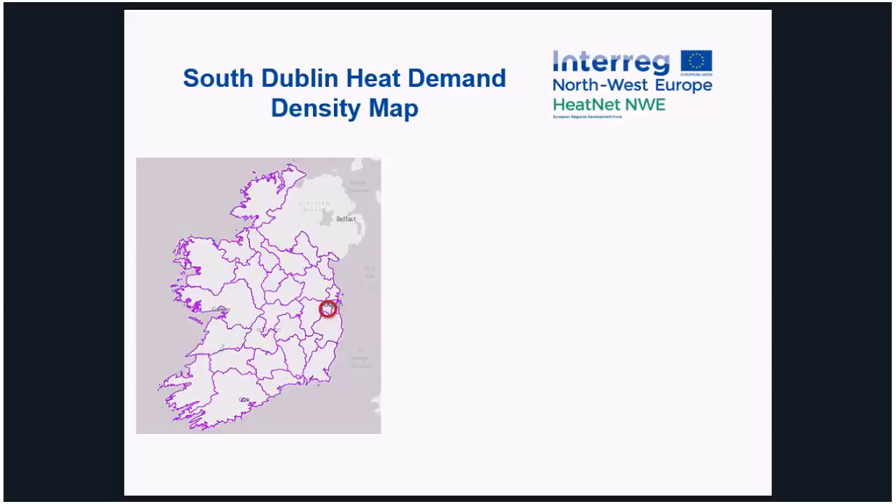We developed a heat demand density map for the region as a first step, to see exactly where district heating is most suited. This is based on European best practice methodologies, specifically from the likes of the Heat Roadmap Europe project.

So we've learned how to map heat demand density, and in this case we base it on terajoules per kilometre squared. In the map, any areas coloured light yellow to red would be deemed suitable, with heat demand densities that would make district heating viable in those areas. So you can see there are a lot of areas where we can start progressing district heating.

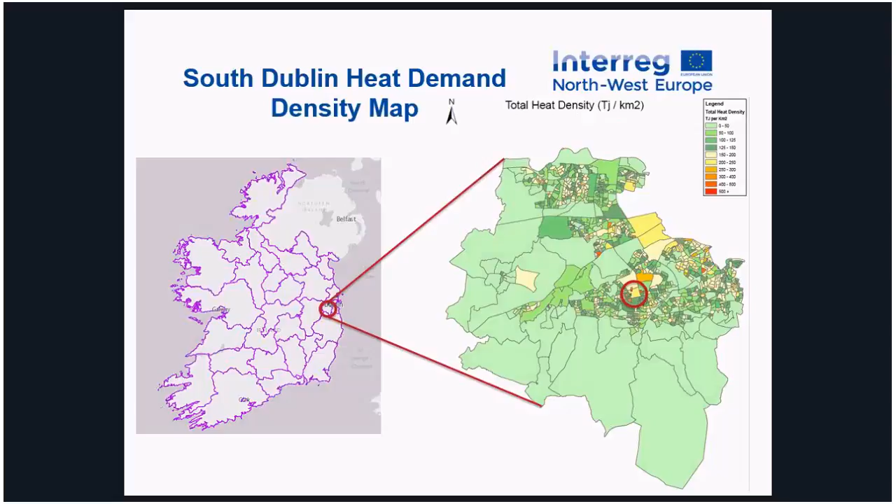But we took the centre, the town centre of the South Dublin region, called Tallaght, as the first stage, because they have a lot of high heat demands in close proximity, and there's a good mix of buildings in the area.

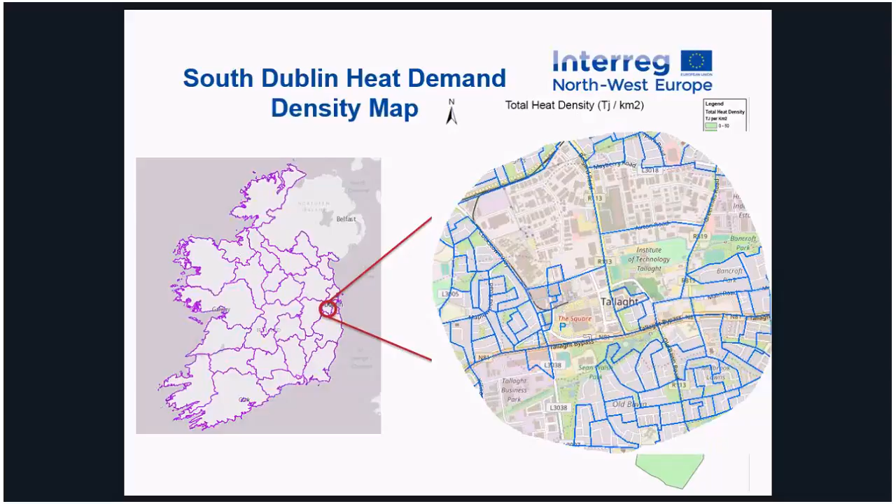So to develop the first phase district heating network in South Dublin, we're looking at the area shown. The energy centre site in the centre is owned by South Dublin County Council, and is where we're planning to build the energy centre itself.

So we've zoomed in on this area as a high potential area for district heating, and in the first phase we're going to concentrate particularly on this area here. We're going to look at connecting the National Hospital and the local authority buildings to the energy centre site as the first phase, and then look to connect to some of the other surrounding large energy demands at a second phase.

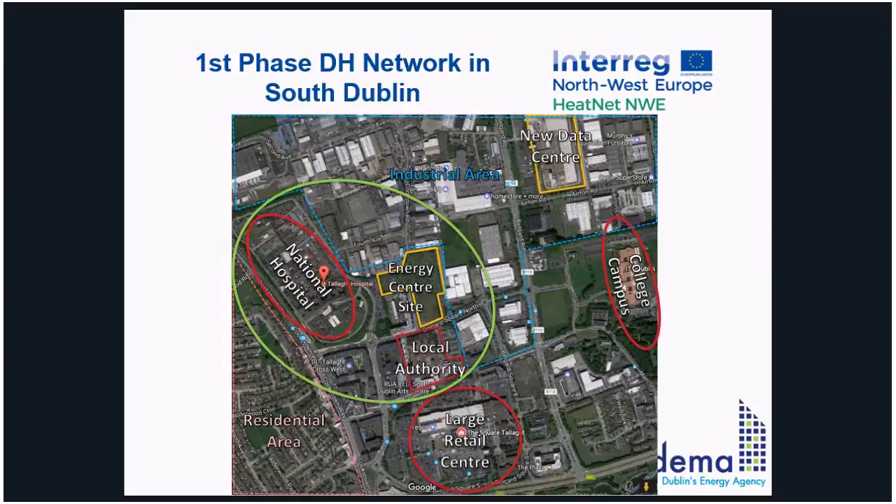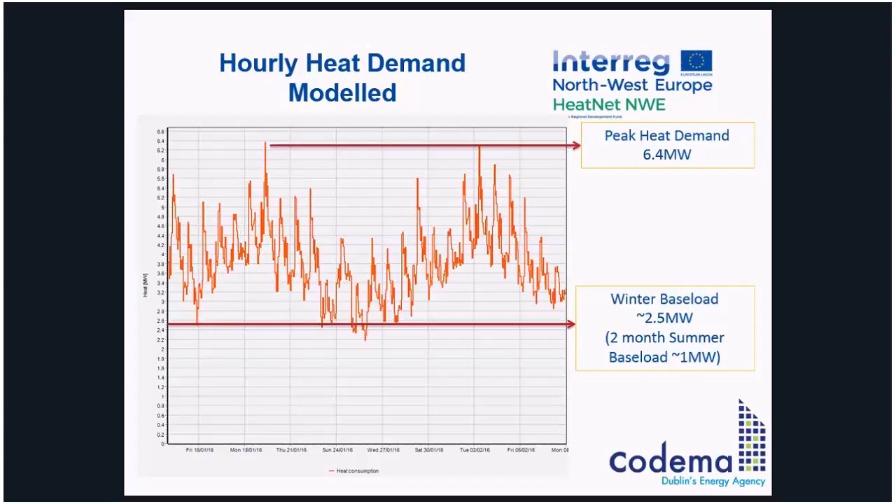We've also modelled the electricity demand of the hospital, as we have potential to supply the hospital with electricity as well as heat. The peak demand there is about 2 megawatts of electricity consistently throughout the year, with a base load of 1 megawatt.

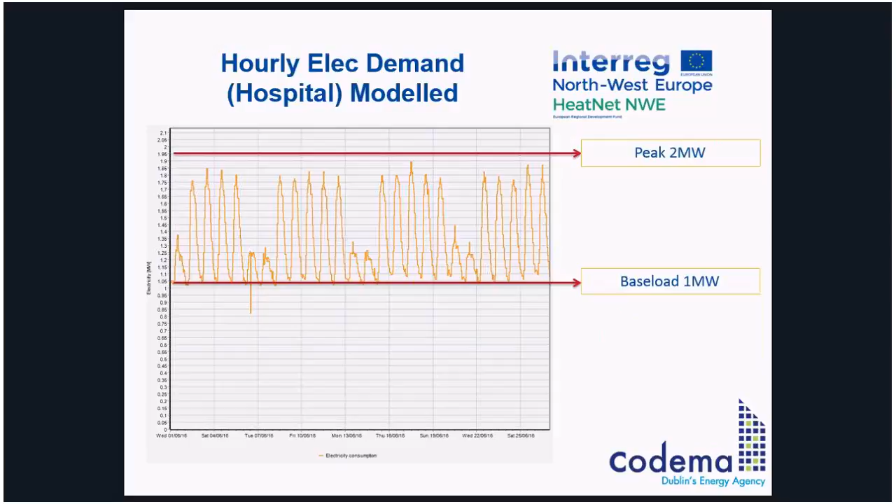So from this information, we are now looking at different technology options that will supply both the electricity and heat demands of these buildings.

So we're looking at air source heat pumps. In Ireland we can achieve a COP of around 3.2, but unfortunately these air source heat pumps alone can't reach the temperatures of around 80 degrees Celsius that we require in order to feed the heat demands of the hospital.

Water and ground source heat pumps - we've investigated the geothermal sources in the area. Aquifers with high yields are not likely, but a vertical closed loop system could still be an option. And as was shown in the last slide, there's a data centre being built very close, within 700 metres of the energy centre site, so there's possible waste heat recovery from the data centre as well.

Obviously, biomass or gas CHP is also an option in order to feed the electricity and heat demands. The site itself is quite easy to access for biomass deliveries, but there may be problems with particulates in the area because it's in a high density area, very close to the hospital and residential areas.

We may not be able to supply electricity directly to the hospital because in Ireland we have a private wire network regulation, which means you cannot supply electricity directly to another privately owned building on another site. So the electricity must go through the distribution system. At the moment we're trying to find a way around this, but it may not be possible to supply electricity directly, and in this case we would have to supply to the grid if we're looking at CHP, and grid connections can be expensive and take a long time.

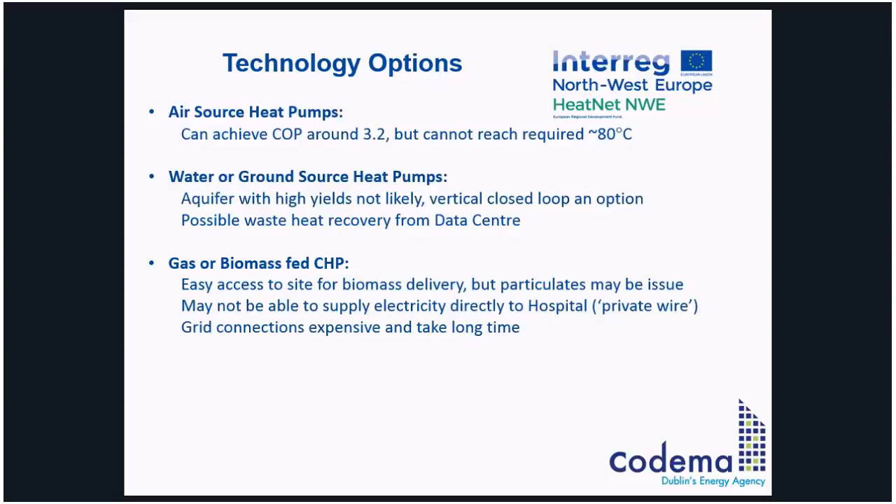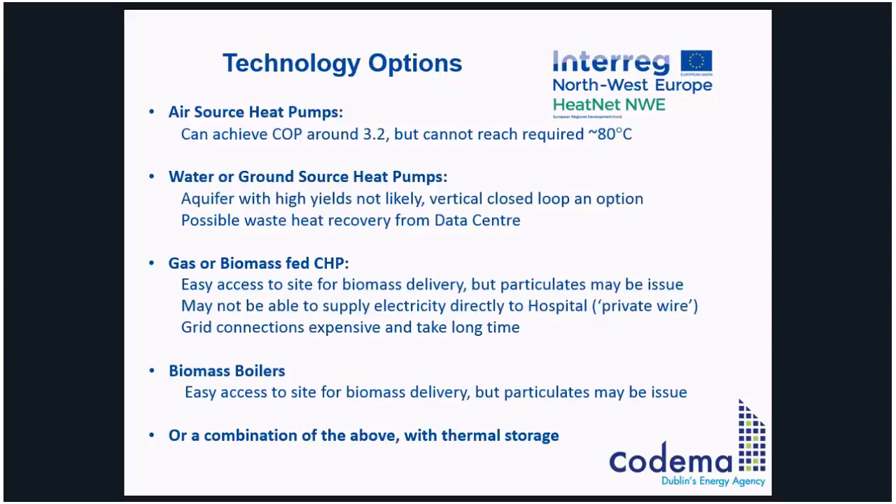Biomass boilers, again, are easy to access for delivery, but again particulates may be an issue. So we're looking at either some of these technology options or a combination of the above, in combination with thermal storage, in order to maximise the efficiencies of any of these systems.

So the main issues for the project are the energy centre itself: what is the best mix of technologies to use in order to meet these heat demands and reduce the costs, and also to achieve some aspects of fourth generation district heating.

The National Hospital, how can we ensure security of supply, which is obviously a big issue for the hospital. And also we have a problem in the hospital at the moment with the delta T, which is the difference in the flow and return temperature, which is very important for district heating in terms of losses and the operation of any of the technologies such as CHP or heat pumps.

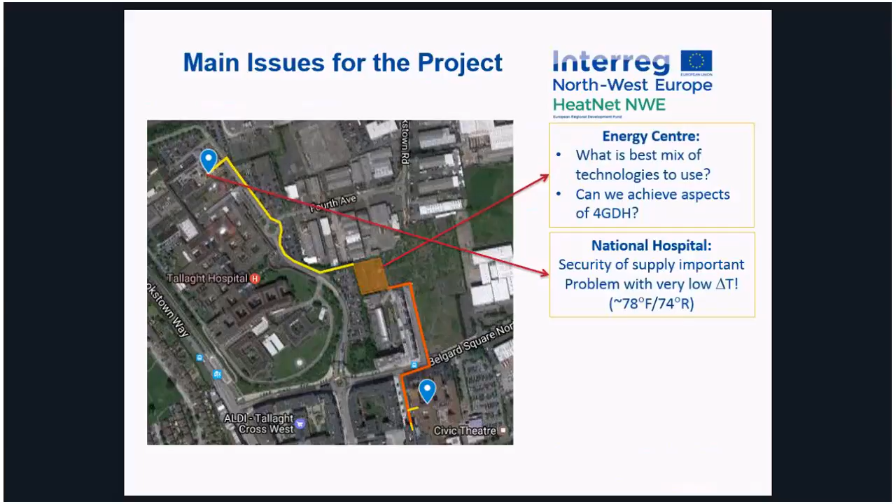So at the moment we have a flow temperature of 78 degrees and a return temperature of around 74, so there's only around a maximum 4 degree delta T at the moment, which is a problem that we need to find a solution to. And in South Dublin, for South Dublin County Council themselves, this will be obviously the first district heating system established by South Dublin County Council.

So what is the most suitable business model option for South Dublin County Council, and what would be attractive business models for ESCOs in this case, and what would be the best procurement approach in terms of, should we look at separate contracts for designing and building the network and the energy centre, or should these ideally be designed and built by the same company? So these kind of questions we would like some advice on from the Celsius experts.

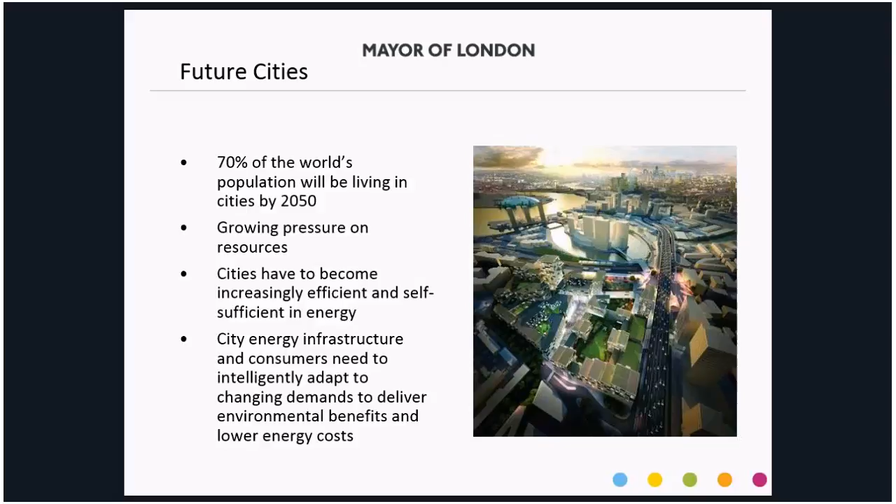London, like many cities, is facing big population growth, massive pressure on resources, housing, transport, education, and it's also increasing demand on energy and energy infrastructure. We therefore need to become more self-sufficient in energy as cities, and also take advantage of smart technology developments to ensure we get the very best out of the infrastructure capacity we install. So we think very much about new energy vectors, energy sources, and how these will be delivered within cities. It's important we begin to think about using less resource and introduce in particular renewables and non-polluting sources.

We can't avoid the fact that energy production locally produces air quality issues. London's in breach of its air quality limits already.

So these are some of the many parameters we've got to deal with when thinking about energy in our cities. It's also important that we think about our role as part of the national energy system to contribute towards security of energy supply.

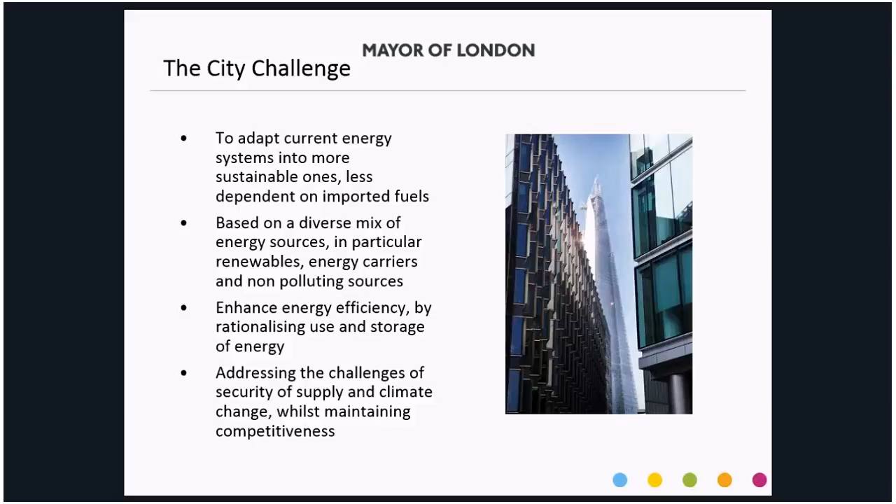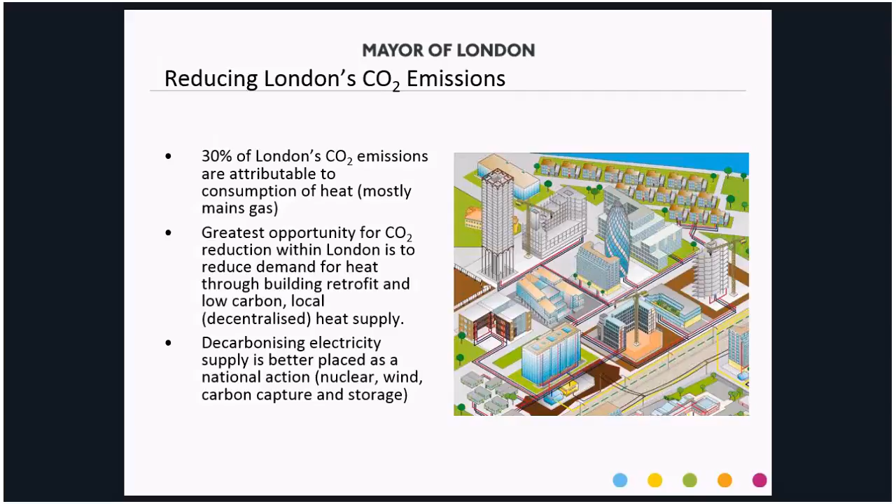We also begin to envisage storage of energy, both electrical and thermal, as being quite fundamental to an optimized system. The biggest CO2 emitter in London, and in fact most European cities, is the energy consumed in building heating. We consume more energy there than in power generation or transport, but it's the least thought about source of emissions, and has the least regulation and policy in place.

So the Mayor has several instruments that came into place. The Greater London Authority was established in year 2000. It has established key documents such as the London Plan, which sets out the policies for London, that it will contribute towards CO2 reductions, and has a certain amount of planning power requiring new developments to either connect to a new heat network, or to connect to heat networks if they exist — of course, we have very little in London — or install their own CHP.

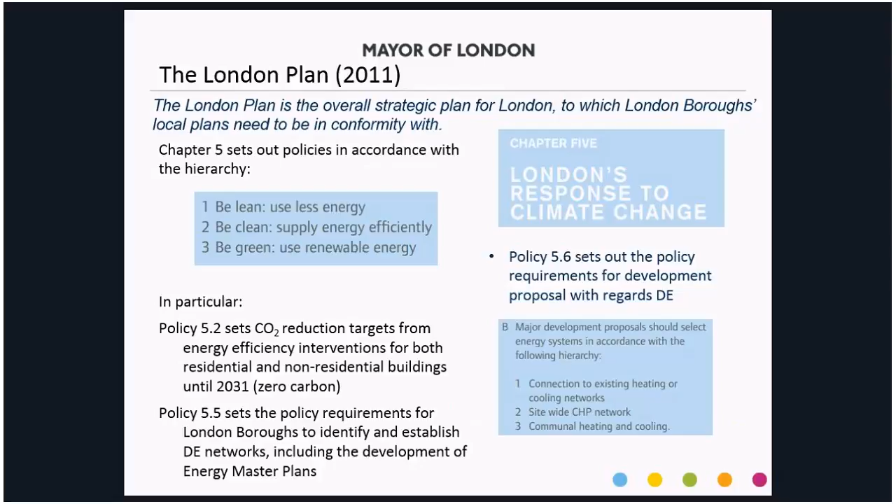So that's been moderately successful, but there are still much larger scale projects that can be done that the London Plan doesn't really establish. The Mayor has produced his climate change mitigation and energy strategy.

Another key document that sets targets for London. The key one for me is that 25% of London's energy consumption is supplied from decentralized energy by 2025. We think this is about an £8 billion investment opportunity.

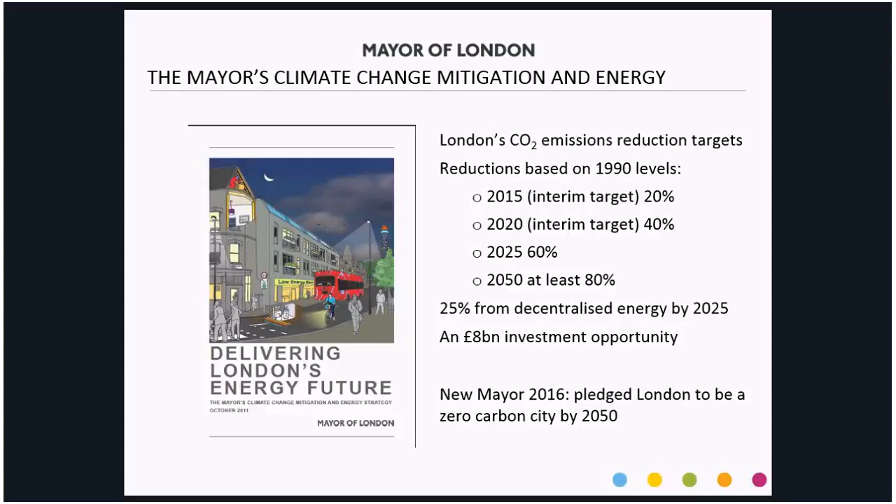So how do we actually get investments into London of that scale? What role does the Mayor have to play to remove the barriers for, principally, the private sector to play its part? If we can get the private sector to play, we'll come a long way in trying to meet these targets. Our new Mayor in 2016 pledged London to be a zero carbon city by 2050. So, very, very challenging targets.

We're in the process of developing more planning tools to inform our policy officers. We're rewriting both the London Plan and the London Environment Strategy. The London Energy Plan is a tool that will be rolled out in the next couple of months, which will help us develop various technical scenarios to meet London's heat requirements.

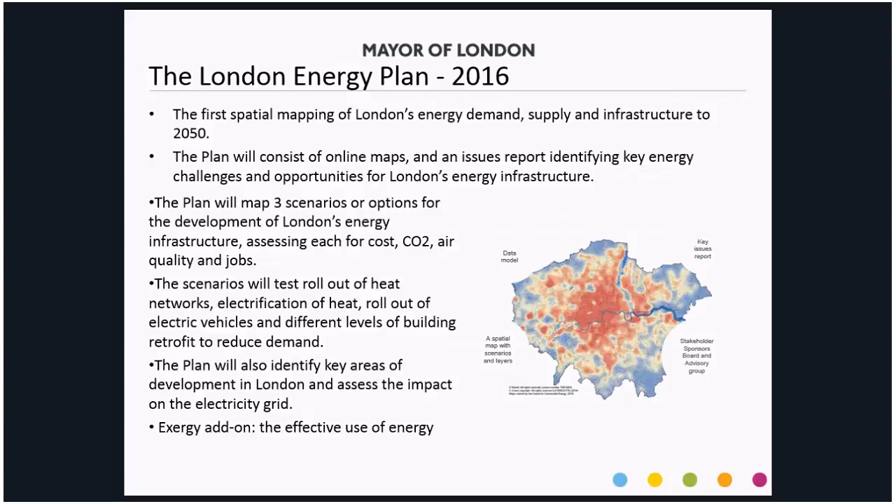Fundamentally, we classify decentralized energy into one of three types. Type 1 are small gas engines located in individual buildings — the London Plan delivers those. Type 2 and Type 3 are larger scale schemes centered around a single energy center with multiple heat consumers. At this stage, we begin to see the introduction of heat networks as the energy carrier connecting the energy source to consumers.

Most of our work at the moment is around establishing the Type 2s with an ambition to become Type 3s, where they take large amounts of surplus heat from power stations and energy-from-waste plants, and transmit these over transmission networks and distribute locally using local heat distribution networks. This is very similar to what we see in the Nordic countries, and this is what we're planning to try and achieve in the coming years.

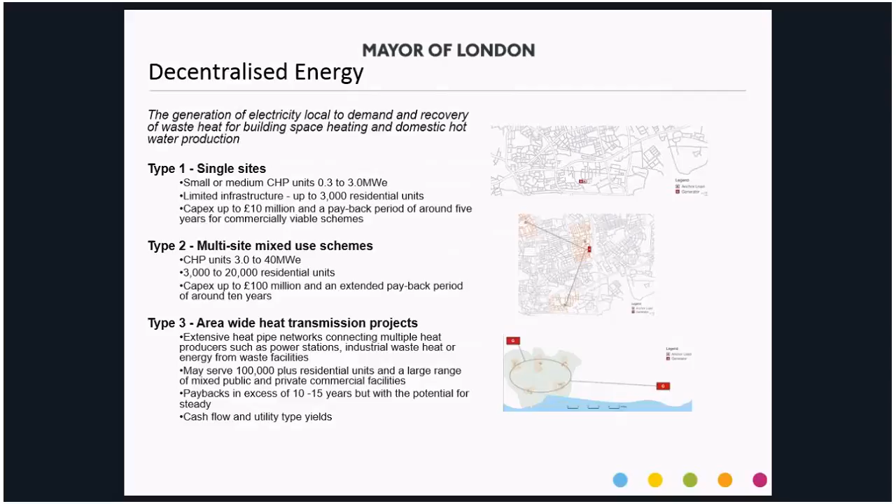So the London heat map — Donna has her heat map, this is the London version. It identifies where the most heat dense areas are, and therefore theoretically best lend themselves to district heating solutions.

We take those, and the Mayor has been providing technical, commercial and financial advisory support, starting with heat mapping, moving on to the energy master planning where we try to establish the extent of market-competitive heat networks. Master plans act as an evidence base for local planning policy and help develop appropriate policies in the boroughs to promote and require heat network projects, decentralized energy projects, to be developed.

But there's a further role then for boroughs to get involved in delivering projects, and that's taking them through the conventional chain of feasibility study, business case, business plan, procurement, and into commercial operation.

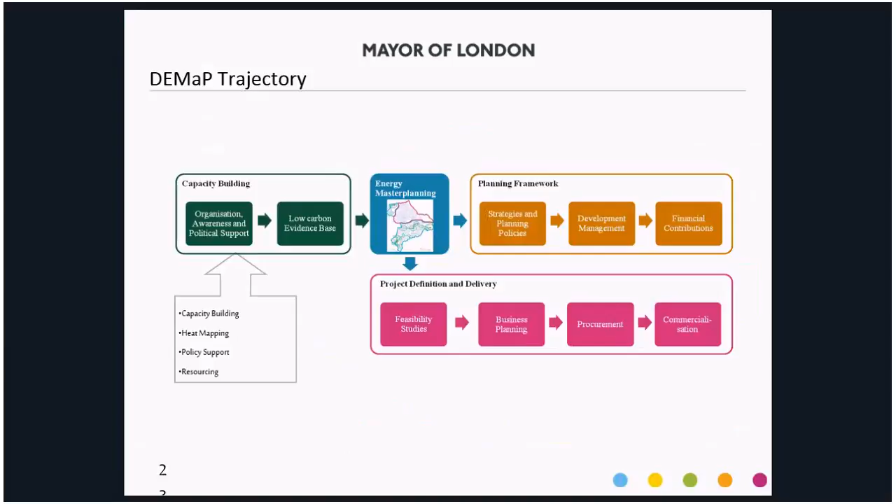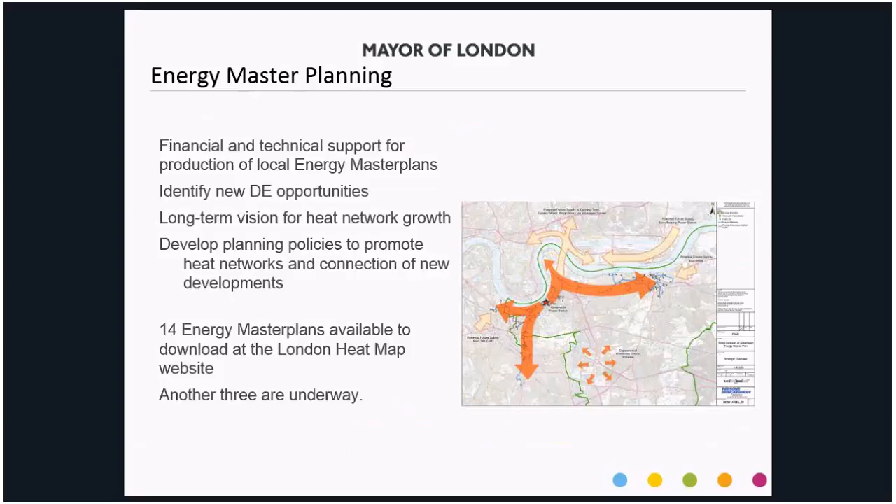Master planning is about establishing the roadmap for the specific area. Typically from this we would identify satellite clusters that would be built initially, with a view to over time interconnecting to form the large area network. These will take 15 to 20 years to evolve, but without the master plan you are blind as to the potential, the direction, and the technical requirements of the satellite scheme. So for me these are fundamentally important to area-wide networks.

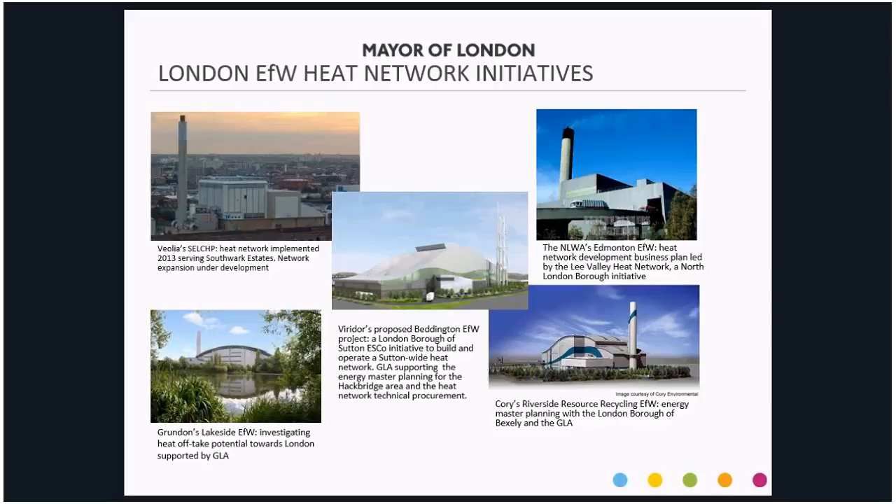Some of the big energy sources, largely untapped but now changing, are London's energy from waste plants, typically with steam turbine electrical output, efficiencies very low in the low 20s, 25% efficient. We now have worked with SELCHP and Lee Valley Heat Network. In fact we've engaged with all the energy from waste plants, some of which have now established heat networks on the back of them or are in the process of doing that. Every new plant in London will be built as a combined heat and power plant, and we work closely with them to ensure the heat offtake is carried out at the pressures and temperatures that lend itself to the lowest possible cost heat supply. It's a very important aspect of energy from waste plants.

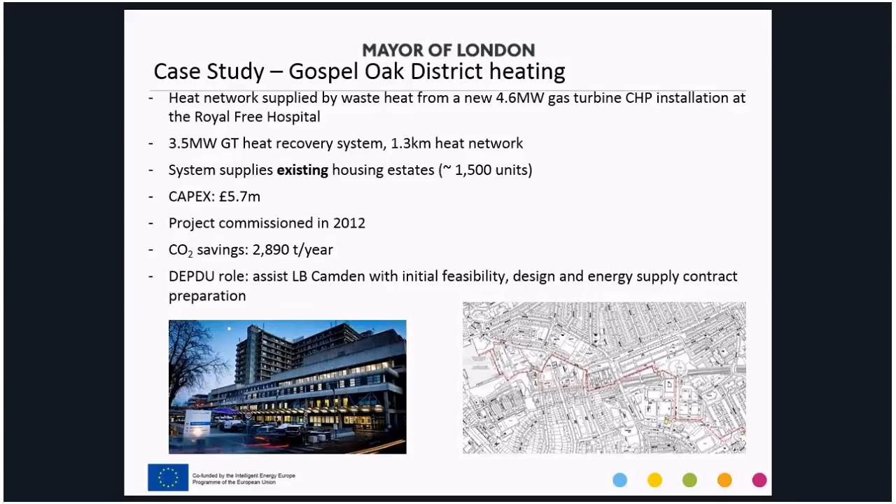One really important aspect of all this study work, which we are beginning to promote more and more, is carrying out the risk register, establishing a risk register for the project. There's a whole range of issues you need to consider, and that helps shape how you go about procuring the plant and equipment, who you contract with, and how much you can rely on them.

Bitter experience in London is you can't rely on any commercial buildings or commercial heat suppliers for their longevity in heat supply. So Donna mentioned data centers - what happens in 5 years' time when technology changes, or they relocate, or technology improves so there's no heat? We've worked with commercial power plants, sugar refiners in London, all of which were unable to commit long term. So in developing and designing your schemes, you've got to really think hard about the energy source, its longevity, or your key anchor heat loads.

The concept here for heat networks is to connect as many heat consumers as possible to get a very diverse energy base and ensure very high operational efficiency, high load factors, and not rely too much on single large institutions as heat customers.

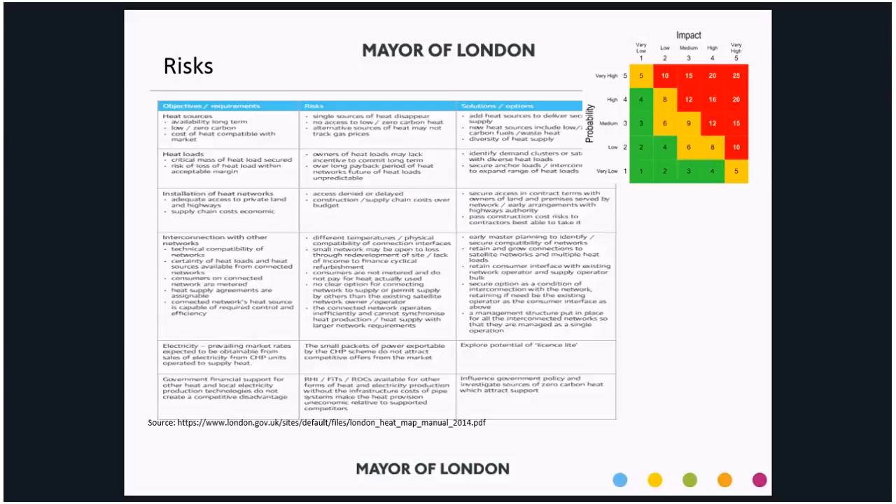So, quick summary. The public sector has a fundamental role in establishing heat networks in cities - establishing the appropriate strategies and policies, then going through the development and evolution of the energy master plan that gives us the long-term roadmap to achieve the strategy and policy objectives, such as CO2 emission reductions in London's case.

Then trying to establish major heat producers. Energy from waste plants are very good in London because they're usually connected to 40-year municipal waste contracts with councils. So we go after those with great enthusiasm.

Furthermore, the public involvement will be about establishing the relevant planning policies around heat networks, requiring developments and developers to safeguard routes and space for energy centres, particularly where we're crossing rivers, rail lines, and other difficult barriers. They can also provide their own buildings, which gives you better assurance around heat load guarantees.

The public sector can also finance projects at lower rates of return than the private sector, and develop delivery vehicles, particularly useful for schemes with long-term build-out plans, because the public sector can take different investment decisions than the private sector would. Therefore, in my view, this lends itself better to larger scale schemes.

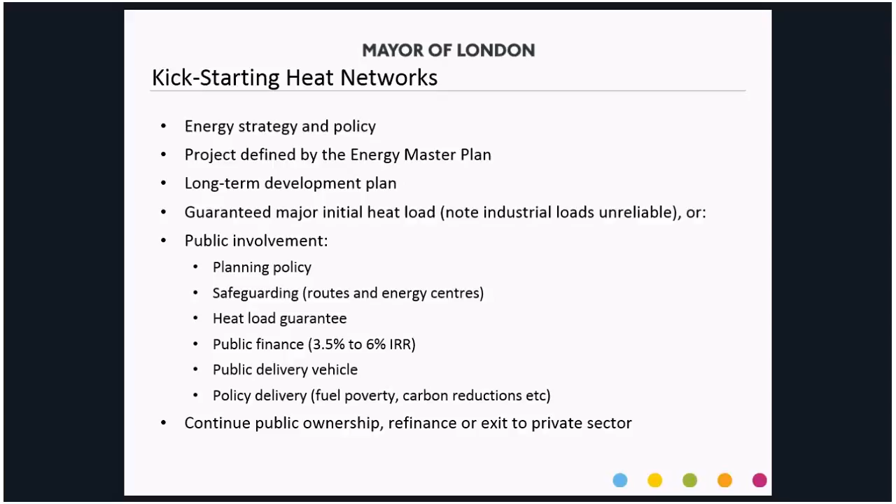And not only that, these schemes can also deliver on local policies, particularly around fuel poverty, carbon reduction, etc. The public sector doesn't have to stay in these projects forever - they can exit at certain points once the cash flows build up and can be demonstrated. We can also refinance at later dates as well. So that was my presentation.

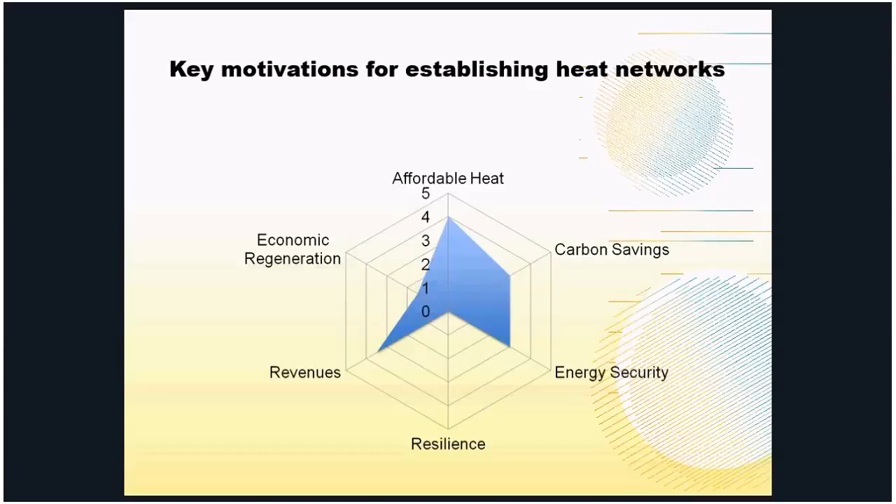So the key technical requirements for doing heat networks are heat density, because the closer the buildings are together, the less pipe you have to put in to connect the two together, and that of course means reduced capital cost.

The third thing is the presence of anchor loads, which is really the focus of my presentation here today. If you have a shopping mall development, you need to get in an anchor tenancy, such as Marks and Spencer's or John Lewis, in order to get the development to stack up, because once you've got them involved, all the card shops and shoe shops and minor retailers will follow on afterwards. The same thing here is that if you get key anchor loads in, then you can actually connect up smaller ones on the back of that cornerstone, if you like.

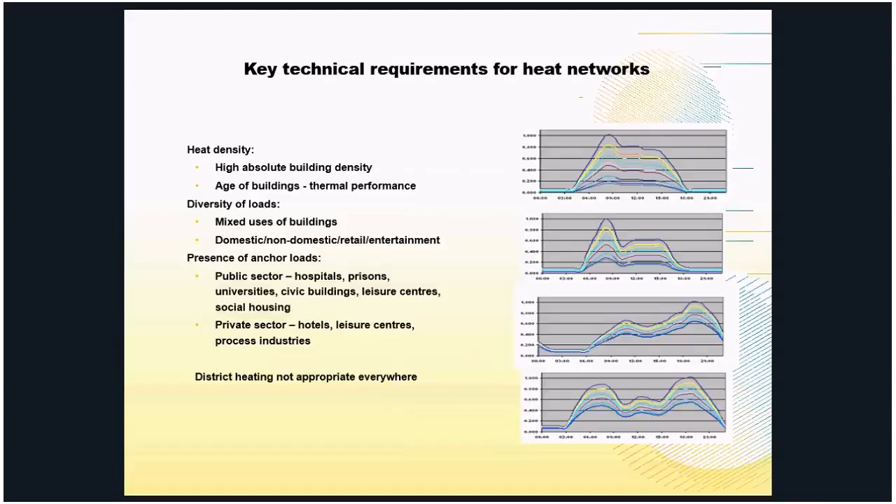One of the organisations I've worked for in the past, and still currently work for, is the London Borough of Islington.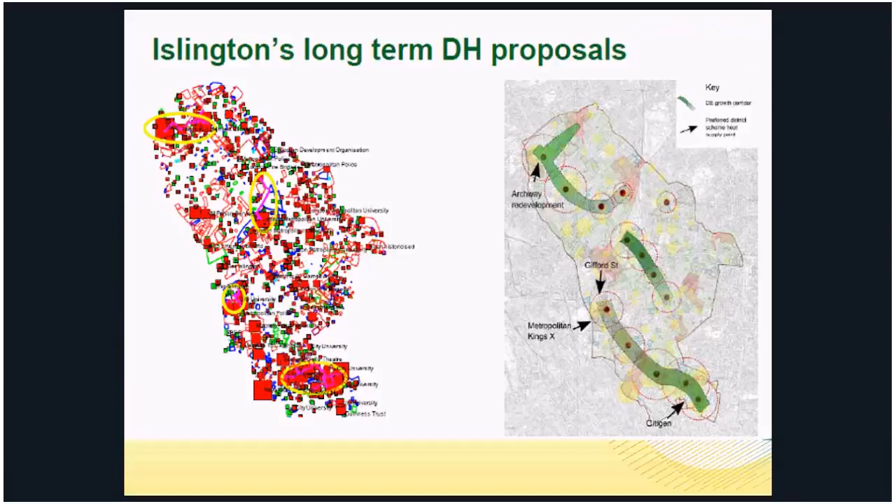The one that's actually been advanced at the moment is Bunhill, on the southern end, the right-hand lower side. They're currently engaged, with Peter's support I might add, with ones in Archway in the top left-hand side, and the Nags Head Town Centre in the middle. Both of those are under development.

Now, these are the key commercial requirements as I see them for heat networks. The first is control, and control relates to the objectives you've set for yourself. Certain objectives need more control. If you want to develop a heat network for regeneration purposes across an area, you most probably need control. Whereas if it's simply about carbon reductions, you most probably don't, because the technology will deliver it regardless.

But if you're handing that over to, say, a third sector organisation, there's a possibility they will cherry pick the key anchor loads and not take it any further. So the degree of control you have over it will enable you to deliver your objectives, depending on what they are.

The bit in the middle is the cost of capital. The cost of capital relates to what rate of return a project will deliver. If a project delivers a rate of return of, say, 7%, and you can access public sector capital through, in the UK, the Public Works Loan Board at 3.5%, then the project is viable. If you can't do that and have to go to private sector capital at 10%, then the project is not viable. So it's a relative situation, and one has to take that into account.

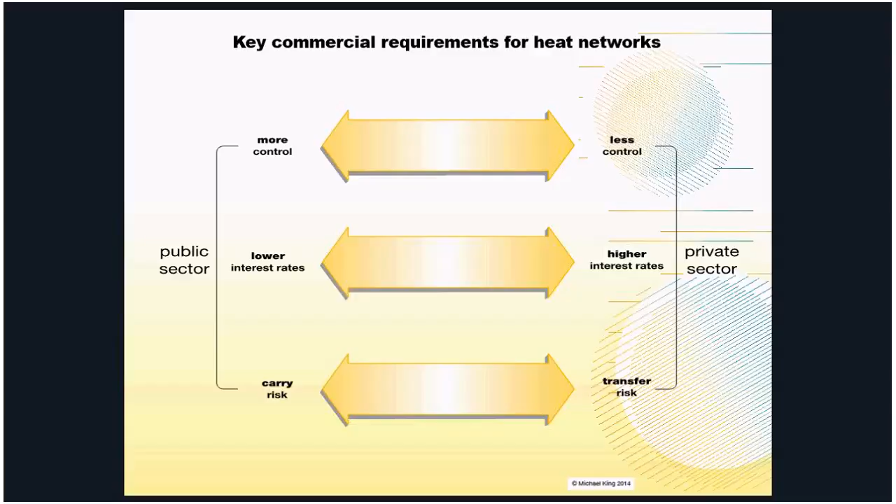The third element, which is one I'm focusing on today, is risk, because the management of risk will actually impact upon the cost of capital. Investors, whether public or private sector, will cost the risk involved, and that will be presented in the rate of return they require on the capital they provide. So risk is important. These three elements need to be taken into account in deciding the delivery vehicle for a given project.

Here's an example from the Scottish Futures Trust, where on the left-hand side you have a public sector controlled organisation, so they've got maximum control over it, but they also bear maximum risk. Over on the other side, control is reduced, but there's a transfer of risk onto that third party.

So in terms of managing risk, Peter mentioned the Upper Lee Valley Heat Network, and I'm on the board there. We've just had green-lit, earlier this week, the refurbishment of the Edmonton Energy from Waste plant, from which we'll be taking the heat.

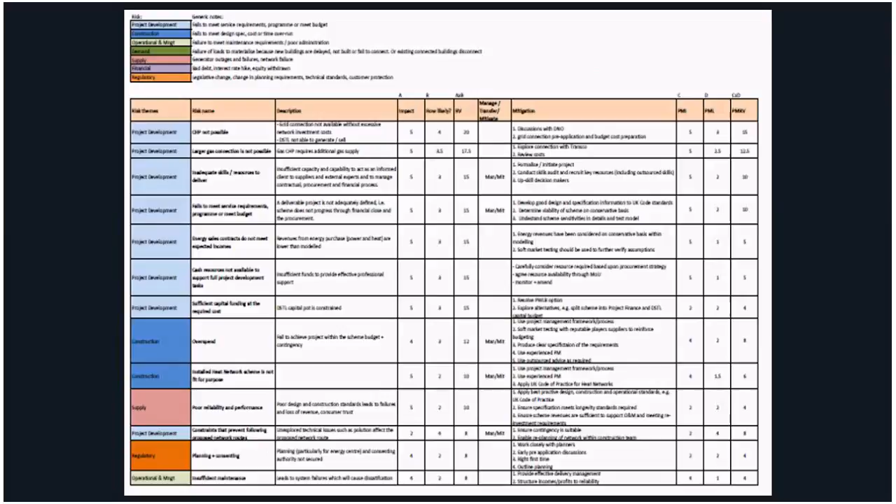Key to this is actually having a risk register, and here is one done for Islington. In it, one identifies the risks, finds out who owns it, describes them, assesses their impact and likelihood, and comes up with a mitigation strategy for how those can be reduced. Then re-evaluate after implementation to see how the impact and likelihood have been reduced or managed, and make a decision about how it should be managed thereafter.

Now, the key risks—and Peter actually identified some of these—these are the ones for my two pence worth.

Design risk, construction risk, operational risk, commercial risk, and regulatory risk. And the key one for me in terms of developing new projects is demand risk.

That is, customers predicted to connect and consume in the predicted volume. In terms of actually managing that risk, if you can influence or control the organizations or buildings that are going to connect to that heat network, then you reduce that demand risk, because you know what they're going to consume and that they're going to connect, and so you have a business going forward. Peter has been able to do that through influencing planning policy in London.

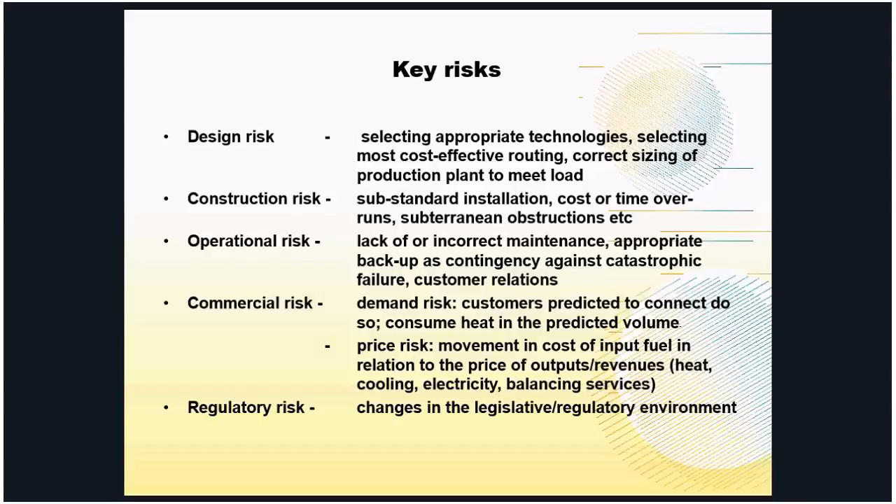It did not have a great experience of district heating. It's not fair to say it didn't have any district heating, because the university campus, all the major buildings on it, are linked via a district heating network—somewhat aged one, but it still exists.

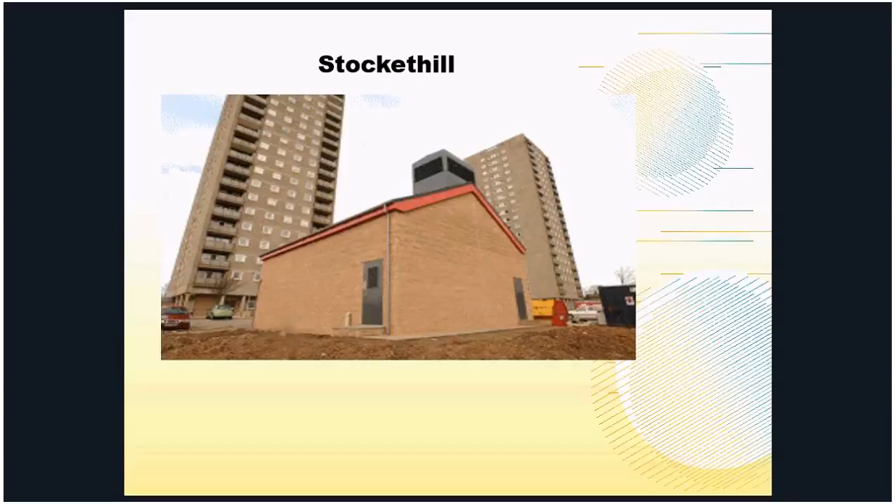This is the plant room that we put in place to serve these 4 blocks in Stockethill, and the planners insisted it be in the vernacular style of the northeast of Scotland, which is somewhat at odds with the brutalist architecture of the tower blocks behind it.

From that, we moved down to Hazlehead, where there was a school with a swimming pool and an adjacent housing estate, and that was then built out.

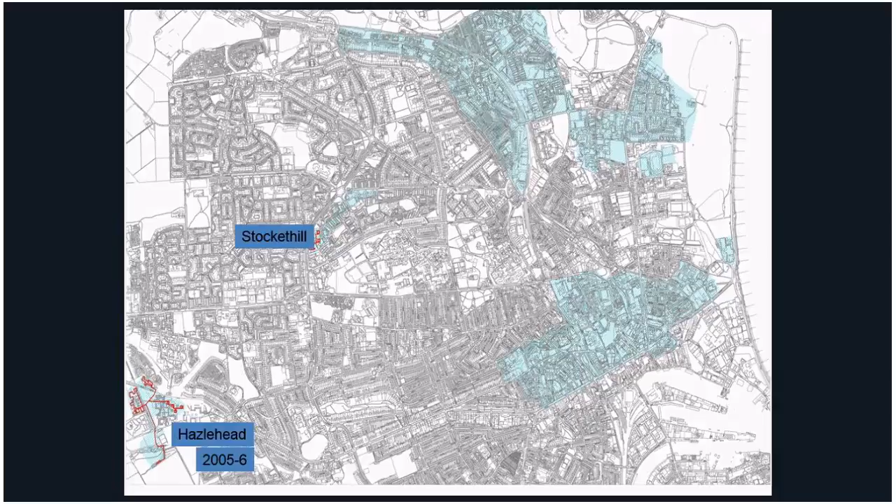Moving on from that, we were able to extend with a slight node out at Seaton to connect an Olympic-size swimming pool, the Aberdeen Sports Village, which was a joint venture between the City Council and Aberdeen University—once again, a very good anchor load.

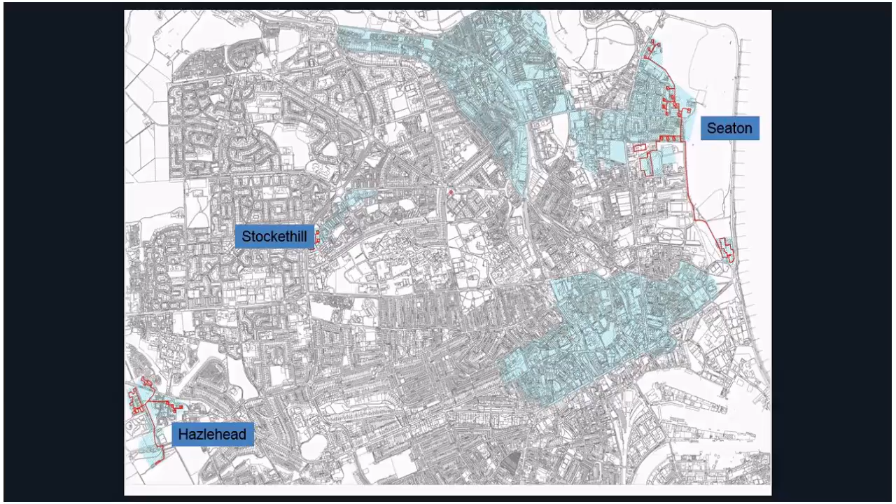That kind of then moved on to extend that network down to a leisure centre, a municipal ballroom, an ice rink on the beachfront there, and then into the city centre, taking in a health centre, a facility for recovering alcoholics and drug addicts, a halfway house to get them back into the community, to get us into the city centre there.

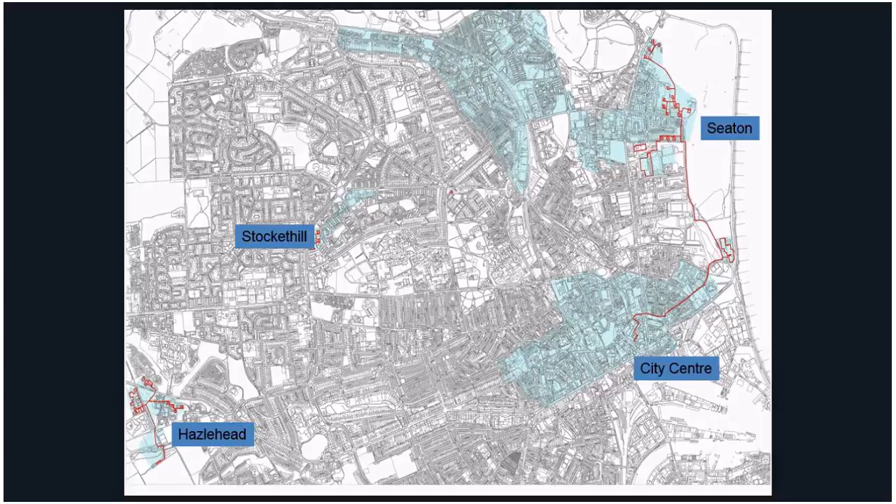From there, we were able in 2014 to connect up various buildings in that area, but also in Torry, which is off the map to the south of the River Dee. Then going back to Stockethill, 2015 to 2016, we were able to extend that to the adjacent housing estate in Cairncry, and at the top of the picture at Tillydrone, a new network serving all the social housing high-rise blocks in that area.

Then opportunistically, the City Council was doing a road alignment in the northwest of the city, which necessitated knocking down a lot of social housing, so we were able to put in a spur out to serve the new social housing that was being built in that area.

Then there's a program in Scotland, the Scottish Energy Efficiency Program, which has an element covering district heating, and we will be able to use access to that to connect up various buildings in the city centre. These are public buildings, the courts of justice, the town hall, the townhouse as it's called, and various others, to densify the network, if you like, in that area.

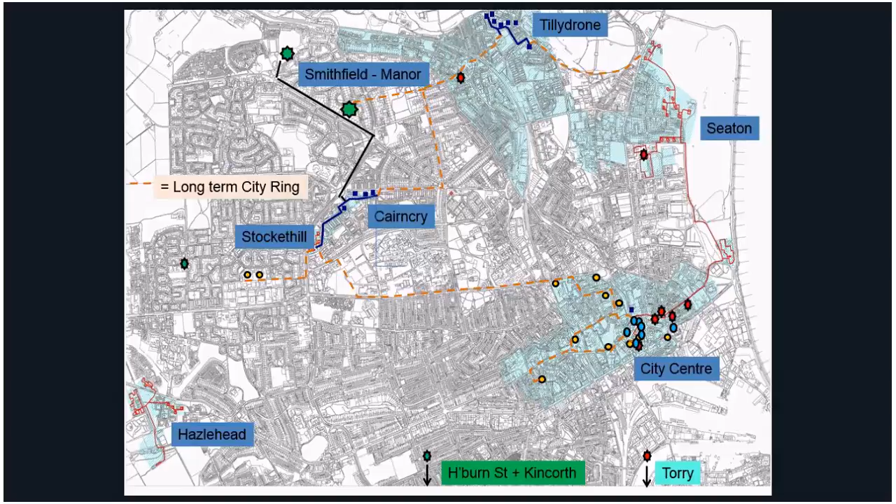We've now identified ones which have potential for the next 2 to 5 years, and the idea is that these will eventually link into a long-term heat main around the city, and that's how we will actually arrive at a ring main around the city that will have multiple energy sources, multiple plant rooms located embedded within that.

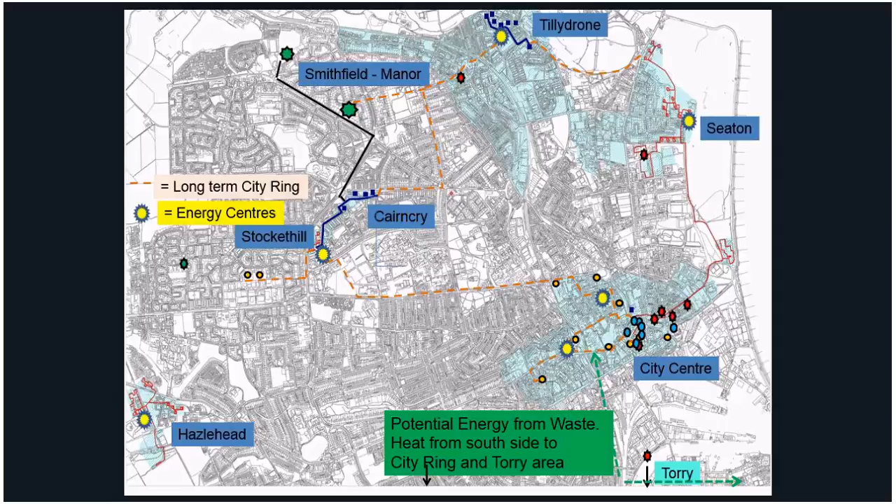The City Council is now proposing to build an energy from waste plant south of the river, and they will have the opportunity of connecting into the ring main to take the heat offtake from that energy from waste plant, very much in the way that Peter was describing earlier. That's where I get to, so thank you very much for your attention, and very happy to answer any questions.

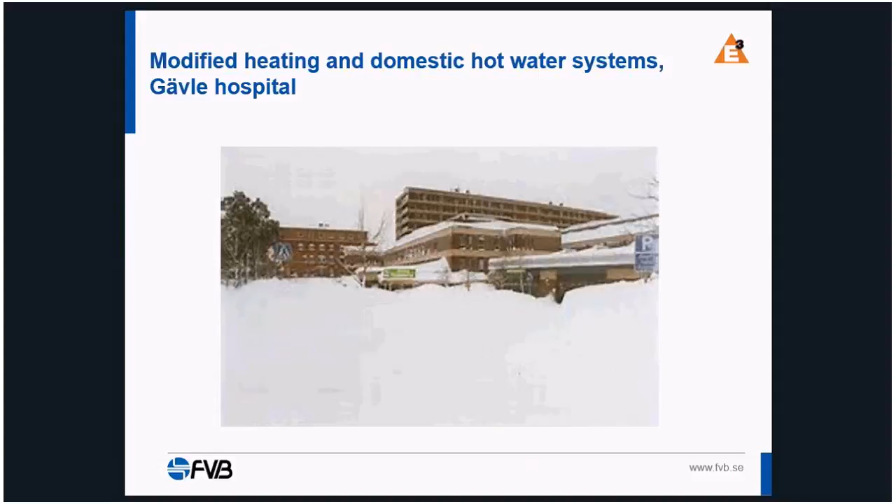So a little bit of background. Of course there are two parties here in this project, and one of them is the hospital themselves, and the other party is the ESCO, that is Gävle Energi, and they are the ones who deliver the district heating to the hospital. The ESCO could see that they had very bad temperatures back from the hospital, and they also had a need for a high flow there.

So of course they could compare with other clients or customers they have, and as they have a delta T of around 45-50 degrees back from the other clients, and from the hospital it was only 15-20, they thought they had to do something about it, and started discussions with the hospital. It wasn't that strange that they didn't get that good temperatures back, as the hospital itself had very, very low delta T in their system - it was only 2 to 5 degrees. And they also had problems with an increase in Legionella.

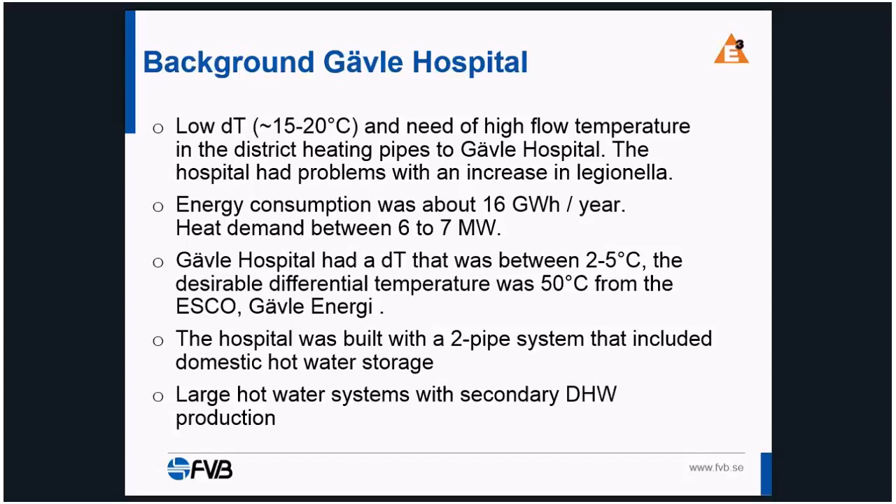So in 2005 we could start the design and the reconstruction of the system in the hospital. And the first thing that we did was to look at how we should split the hospital into smaller systems. So we chose to divide the buildings into 12 separate district heating stations, each of them with its own heat interface unit, HIU.

And to be able to have all these separate HIUs, we had to install new district heating pipes to reach each building. And here we had the possibility to do it in culverts that they had inside the hospital. So it was a way to do the connections there.

As I said, it was a 2-pipe system inside the hospital, and they had a lot of water heaters or storage for the domestic hot water, and we removed and replaced all of those storages with plate heat exchangers instead. So we had a direct production of domestic hot water through the plate heat exchangers.

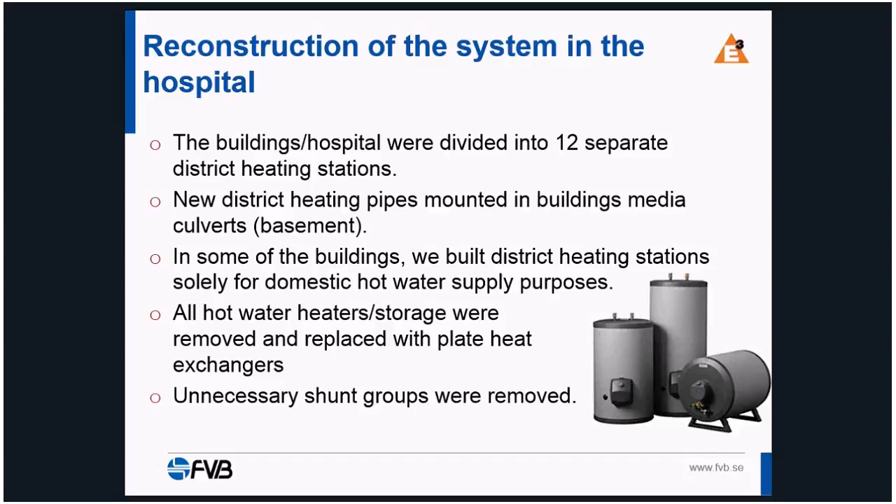So also for the radiator system, as we always do today, we use brazed plate heat exchangers, as they have a very high efficiency. We can take very good care of the temperature and the temperature programs between the primary and secondary system. We always use variable speed pumps.

We didn't do anything actually about the radiators up on each level of the hospital. Instead, we installed new balancing valves down in the basements. But one of the most important things that we have done, and that's generally what one has to look very carefully at when installing district heating, is the control valves on the heat exchanger units.

It's very common that you have something you call a KV value of the control valves, and if that value is too big in relation to what they actually should work with, you will have very high variations in the flow in the system, and that is what you want to avoid. So it's very important that you have the right KV value, and as low a KV value as possible.

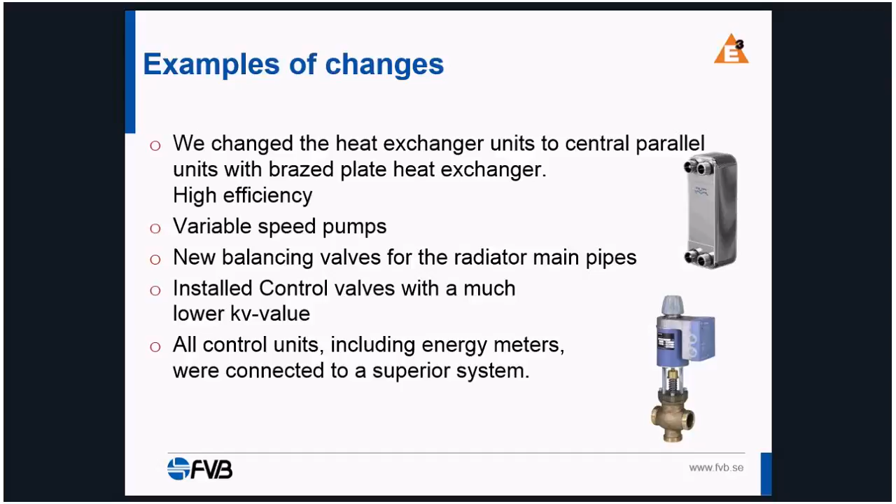So what did we obtain with these measures? The hospital reduced their energy consumption by about 20%. And as we took away all of the storage for the domestic hot water and installed plate heat exchangers, we reduced the risk of Legionella growth. It's also much easier for the personnel running the system to analyze it, maintain it, and make individual operation settings. So they are very satisfied with the system today.

And the most important thing is that we have got a much higher delta T in their system today, and that also lowers, of course, their energy demand for pumps and those things. And the payoff for the hospital was around 4 years.

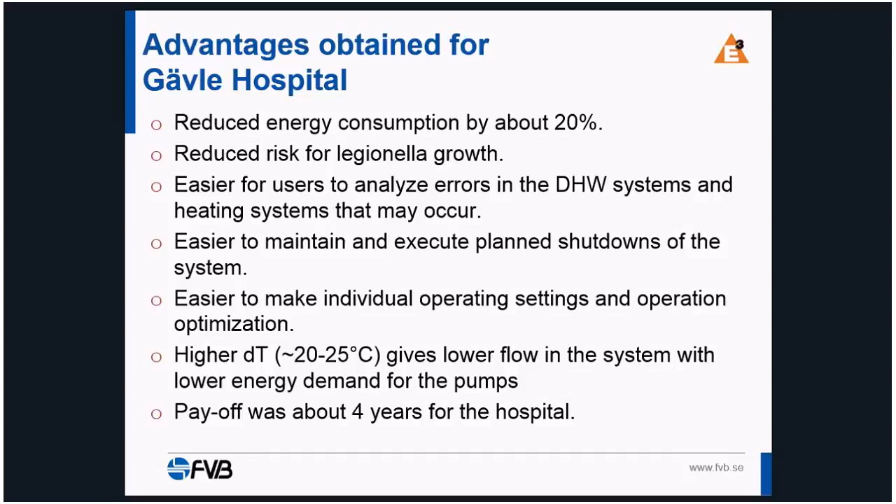If we go to the ESCO, the advantages for Gävle Energi: of course, they also got a much better and higher delta T. Today they have an average from the hospital of 45 degrees. And that also gives lower demand for the pumps, etc. And they have, of course, some lower heat losses also.

But another very interesting thing here is that when we install control valves of the right size, with a very low KV value for the system, it gives you a much more stable pressure in the whole network.

We should think of that the ESCO, Gävle Energi, they haven't done this only for this hospital, they have done it for all the big customers that they have. So they have been very active to try to

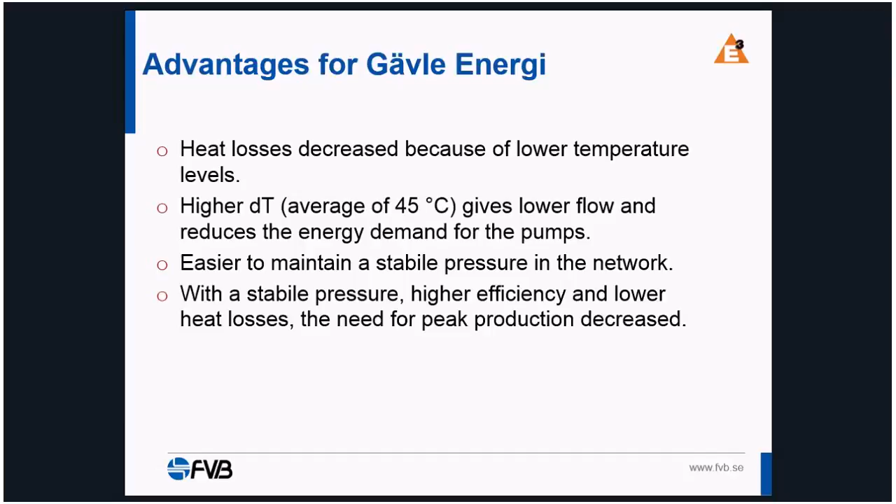This hospital wasn't the first building that they did this for. As I said, they have the road to success, which came through a lot of studies that have been done before, and the interesting thing is that the ESCO, Gävle Energi, was willing to test all the equipment as well and see how they can improve the system.

So from the very beginning, they started with doing tests for apartments, by trial and error. When we design a system, you have certain parameters you have to follow, and we could see that you could go so much lower in these parameters than we thought from the beginning. So as I said, it was an amazing result.

We could change the kv value from 10 to 1 in some places. So it was very interesting there.

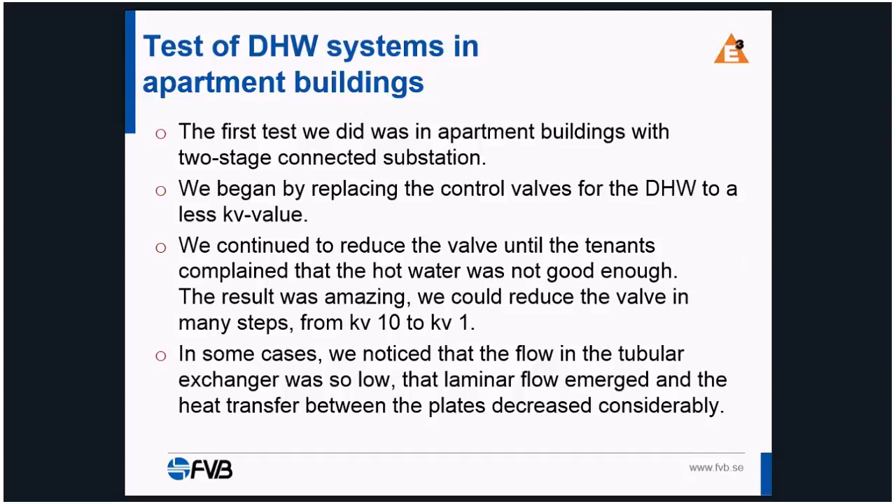And when we had done the tests for the apartments, we went further and took hotels, sport arenas, and things like that, places where you almost always have some kind of storage for domestic hot water because you think it's needed. But instead we replaced all this. We installed plate heat exchangers and produced domestic hot water in that way instead.

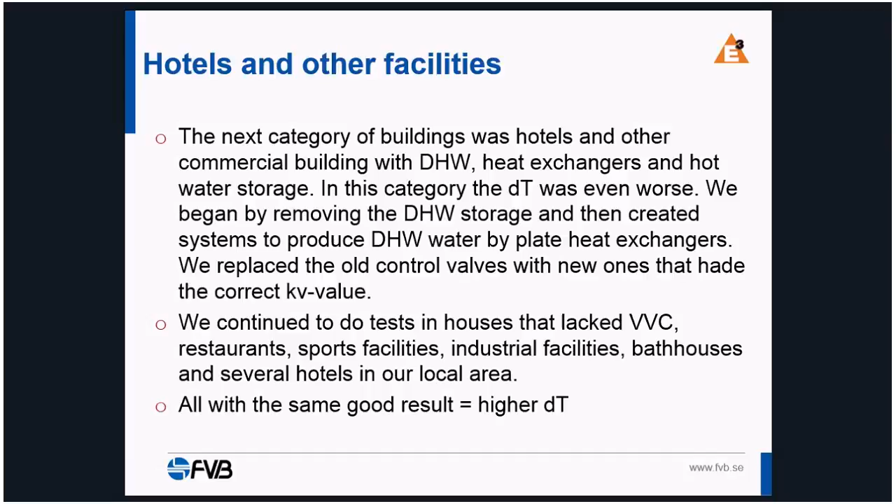And everything that we did was with the same good result. We got a higher delta T from each customer that was connected. We have, before this presentation, discussed with both the hospital and Gävle Energi if you would like to come and show them, and they are very open to that. If you would like to come and see it, it's of interest for them as well. So yeah, that's all for me by now.

Thank you. Okay, thank you very much, Ola, for sharing the experiences from Gävle and Gävle Hospital. Donna, do you have any questions straight away for Ola?

No, I suppose just a comment. It's all very relevant information there for us in particular. It's very interesting to see how they reduce or increase the delta T and the kind of short paybacks. I suppose just one thing I want to be clear on: the actual investment in the hospital for the refurbishment and the new system.

This investment was shared between the ESCO and the hospital, with the ESCO being the district heating supplier. Is this correct? Yeah, they shared the investment between each other. So it was...

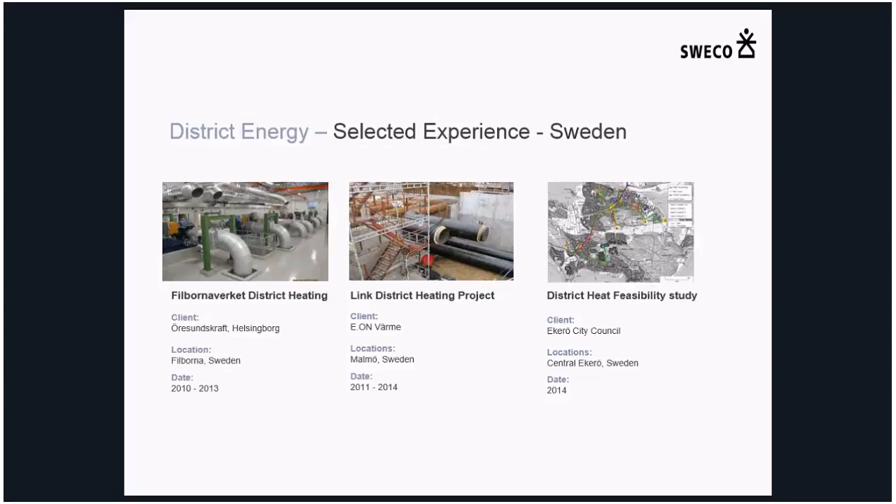Then I would like to mention, go further to the wrong button. We've been working quite much in Stoke-on-Trent together with Nordic Heat, and Nordic Heat supplies advisory on business models and tariffs and so on. But what we do then is we do this assignment in different phases here, and I think it's quite similar to the situation you are in Dublin, what they've been facing in Stoke-on-Trent.

So Michael, I will turn the computer on here so we can. Sorry. Michael, who is the project manager for this, together with the Stoke-on-Trent team and Nordic Heat, will give a little explanation of how we have thought from the beginning in this project and what challenges we have overcome. We've been working with it for 1 year now. So please, Michael.